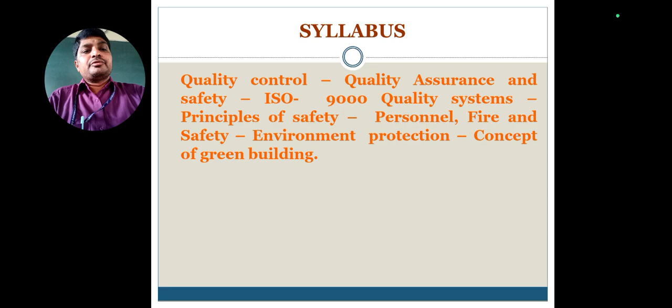I am going to explain about quality control, which comes under Unit 3 of Project Management subject. First, what we have in the Unit 3 syllabus: quality control, quality assurance, quality safety, ISO 9000 quality systems, principles of safety, personnel and fire safety, environmental protection, and the concept of green building.

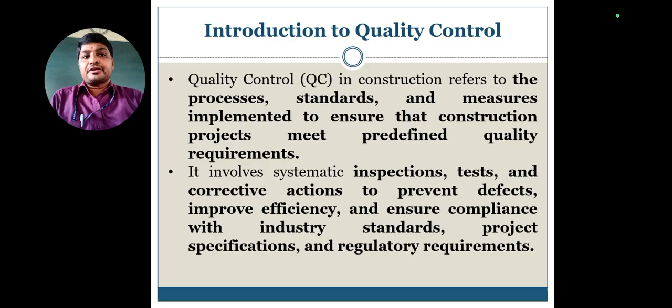Coming to the introduction part: quality control in construction refers to the processes, standards, and measures implemented to ensure that construction projects meet predefined quality requirements. It involves systematic inspection, tests, and corrective actions to prevent defects and improve efficiency and ensure compliance with industry standards.

Then, what is the importance of quality control in construction? It is to ensure safety, that means reducing structural failure, accidents and hazards that may happen, which will be reduced by ensuring safety.

With compliance of standards, local building codes or national and international codes will be satisfied through maintenance of quality, and safety regulations to be followed and industrial best practices to be implemented in the construction site, along with enhancement of durability, which increases the lifespan of the structure.

We can reduce rework and cost by preventing costly repairs and project delays. So that means this is the importance of quality control.

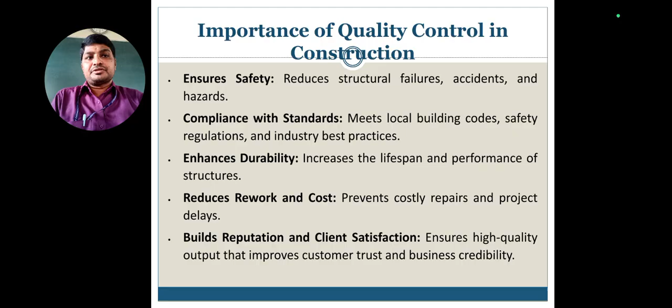For this kind of importance, quality control also builds a reputation and client satisfaction. So in this way, quality control is very important, and the construction industry should follow the rules and regulations for quality control.

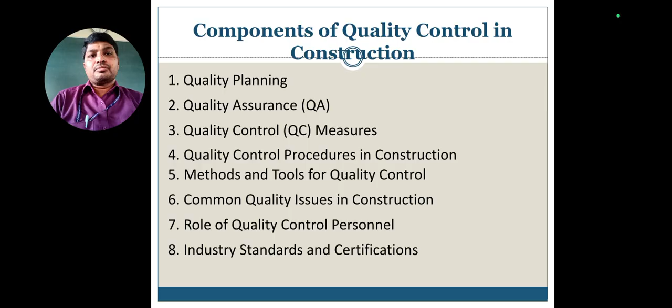Quality control has a number of components: quality planning, quality assurance, quality control measures, quality control procedures in construction, methods and tools for quality control, common quality issues in construction, the role of quality control personnel, and industry standards and certification.

Coming to the first one: define the project quality objectives and identify the quality standards like ISO 9001 related to the construction industry, ASTM international standards, BS British standards, and ACI American Concrete Institute. These give some standards which are identified by quality, and developing the quality management plan also comes under this quality planning component.

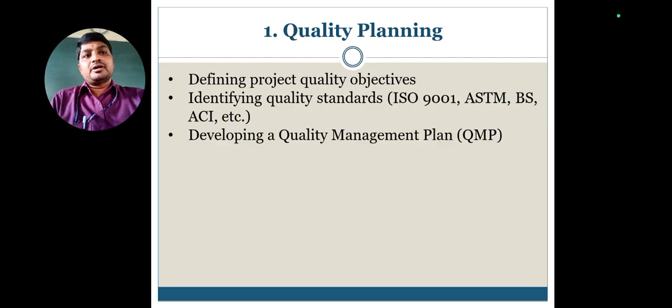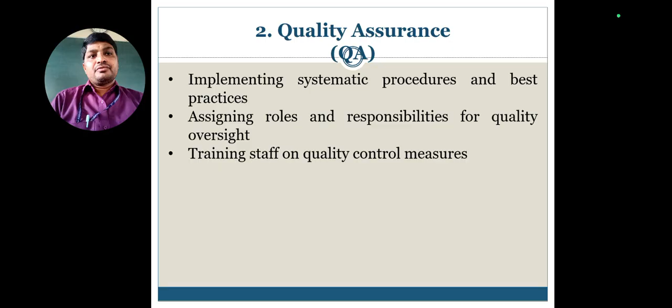Quality assurance involves implementing systematic procedures and best practices, assigning roles and responsibilities for quality oversight, and training staff involved in the construction site, like labor, supervisors, or engineers, for getting quality control measures.

The third one is quality control measures: material quality control, workmanship quality control, and testing and inspection process. Material quality control ensures the raw material complies with specifications. Workmanship is checking proper execution of construction activities. Testing and inspection is conducting periodical on-site or laboratory field tests for material and workmanship.

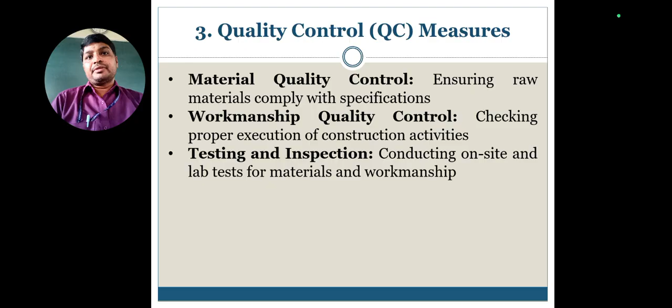The fourth one is quality control procedures in construction. There are three kinds of procedures followed: the pre-construction phase, during construction, and after completion of construction.

Coming to the first one: establishment of quality control procedures and quality benchmarks. The benchmark should be fixed by quality control, and that benchmark should be satisfied with implementation of qualitative material, qualitative design, drawings, specifications, and conducting supplier material evaluations. This way, the pre-construction phase of quality control measures should be completed.

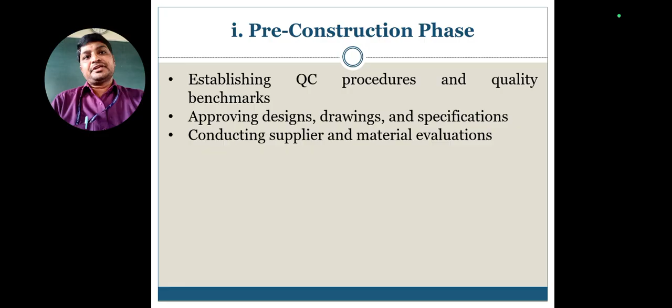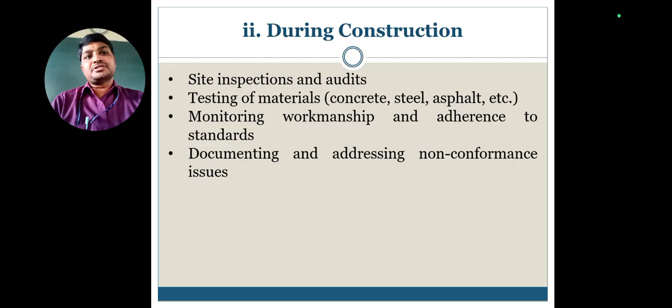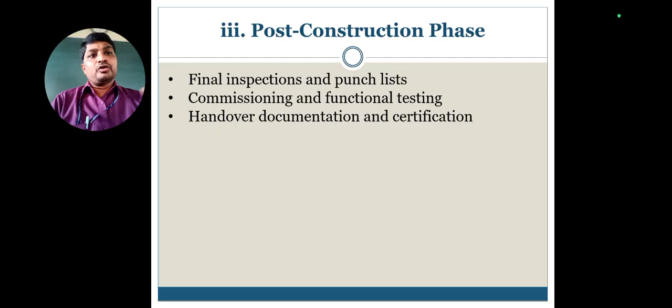Final inspections and punch lists should be prepared, and commissioning and functional testing should be prepared, and handover documentation and certification given to the client or owner. That is the final stage of quality control which has to be completed.

Then one more component, the fifth one: methods and tools for quality control. First, visual inspection should be completed. Second is material testing. Third is non-destructive testing like ultrasonic, radiographic, and magnetic particle testing.

And statistical quality control, that is analyzing defects using statistical methods, and use of technology like drones or artificial intelligence based defect detection, and building information modeling. So a number of methods and tools are applied in quality control.

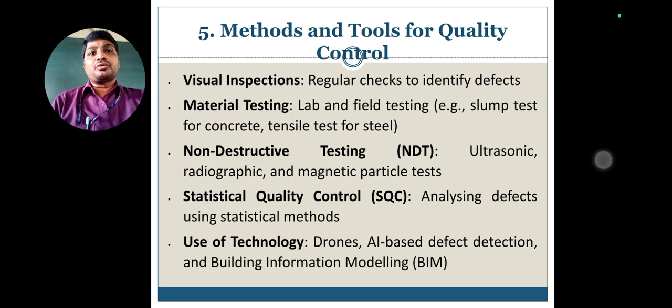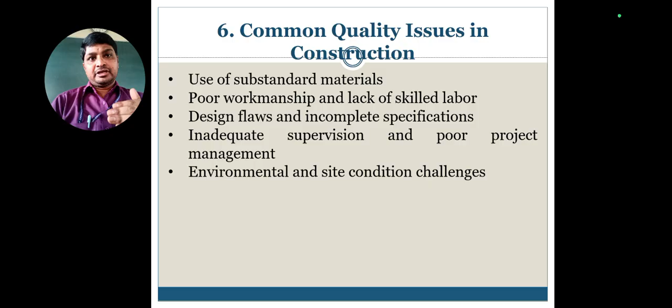One more point is common quality issues that may arise in construction: use of subnormal or substandard material, poor workmanship and lack of skilled labor, design flaws, incomplete specifications, inadequate supervision and poor project management, and environmental and site condition challenges. These come under common quality issues.

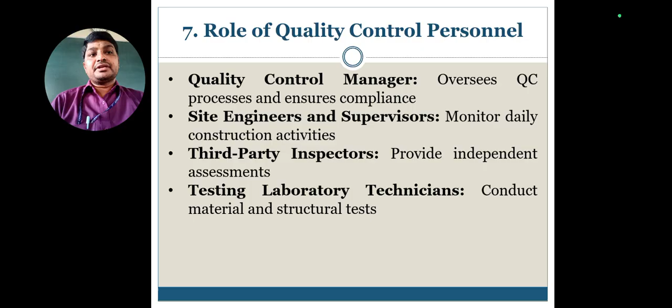The role of quality control personnel: the quality control manager is the boss of quality control, processing and ensuring compliance between the builder and owner. Site engineers and supervisors monitor the construction activities happening in the construction industry. Third party inspectors provide independent assessments, and testing laboratory technicians conduct material and structural tests.

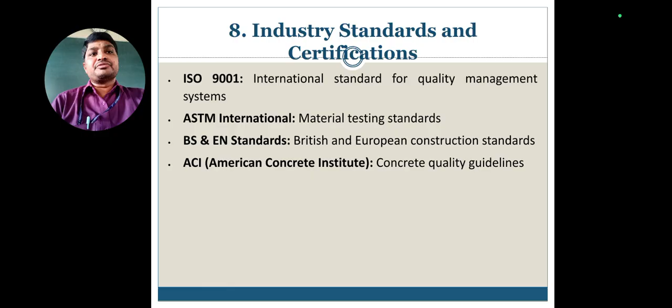Industry standards and certification: the certification process comes from ISO 9001, the International Organization for Standardization for Quality Management System. ASTM International Standards for material testing standards. BS and EN standards like British and European Construction Standards. ACI, the American Concrete Institute, for concrete quality guidelines. These are the standards and certifications that should be followed by quality control.

Now coming to the challenges in quality control and how to overcome them. These challenges are very crucial for the maintenance of quality control.

The first is poor communication, which can be rectified by implementing clear quality control documentation and reporting. Whenever we observe poor communication between labor and supervisors, or between skilled and non-skilled persons, it should be clarified through quality control documentation and reporting processes.

The second challenge is non-compliance with standards. In most cases, this type of challenge arises in the construction industry. Compliance with standards is very crucial, because following standards in quality control is very important. Standards should be followed, and the compliance with standards is very crucial to quality control management.

This can be overcome by regular training or preparation for third party audits. Standards should be followed, and whatever non-compliance activities are located by quality control must be reconstructed, modified, or rectified by the people maintaining the construction industry. That is very much essential.

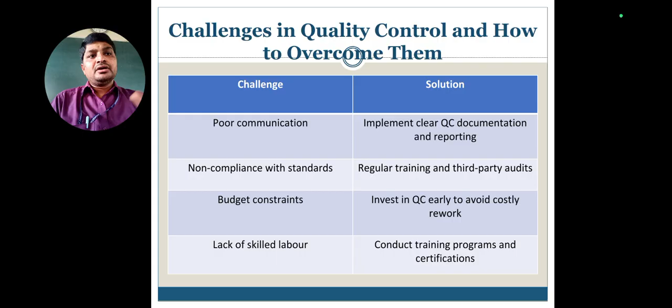Then coming to the advantages, what are the advantages of quality control in construction? It ensures structural safety, preventing accidents, failures, and collapse by ensuring compliance with safety standards, and reducing rework and cost overruns.

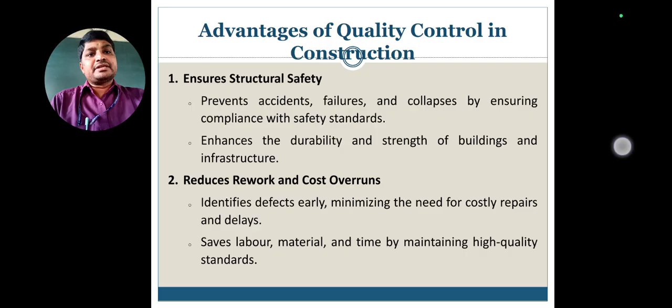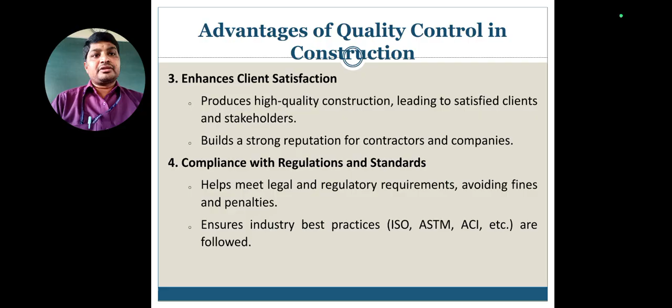It identifies defects early, minimizing the need for costly repairs and delays, and enhances client satisfaction. So finally the client will be satisfied with high quality construction and compliance with regulations and standards, which is also a type of advantage.

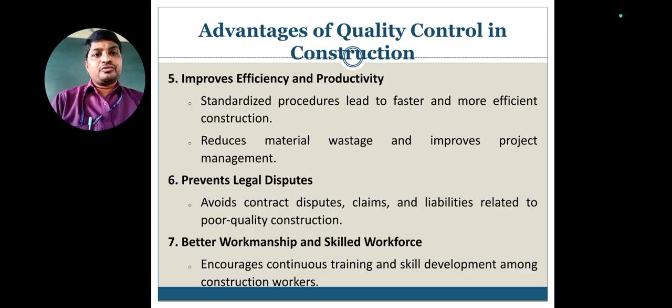One more advantage is it improves efficiency and productivity and prevents legal disputes. Disputes arise between the client and owner, or the client and builder. Some kinds of disputes may be prevented or avoided by providing quality control, and better workmanship and skilled workforce may result from following quality control measures.

A disadvantage of quality control is that it initially has high cost, requiring investment in testing processes, inspection, and skilled quality control personnel, which may increase the overall cost of the project in the short term.

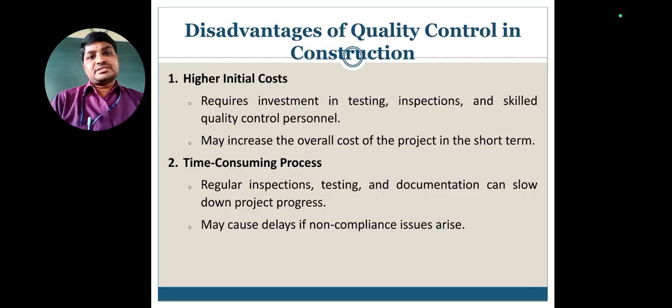Time consuming process is also a disadvantage for quality control, that is regular inspections, testing processes, and documentation can slow down project progress, and may cause delay when non-compliance issues arise.

Complex implementation and dependence on skilled professionals is another issue, requiring experienced engineers, quality inspectors, and auditors. Shortage of trained personnel can lead to inefficiency in quality control.

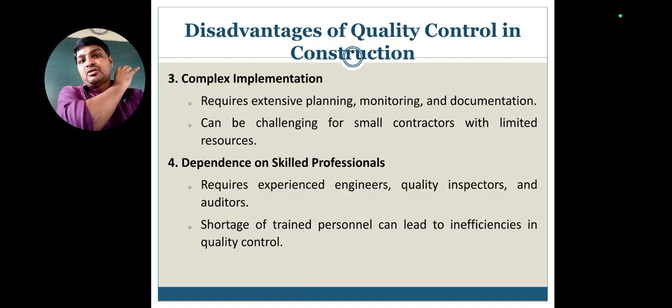Then resistance to changes and difficulty in measuring workmanship quality, and unforeseen site conditions may also be disadvantages, that is unpredictable weather, soil conditions, and labor issues may affect the quality control procedures. So these are the main disadvantages of quality control.

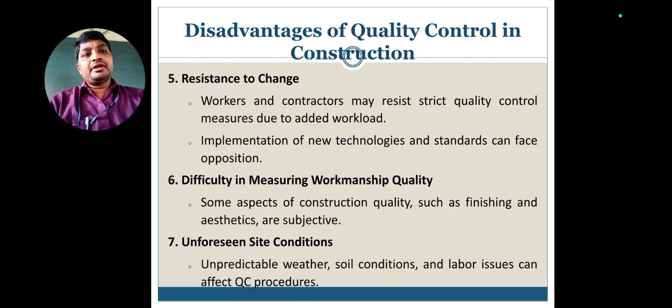And finally, what we conclude is that quality control in construction is a critical aspect of ensuring safe, durable, and high standard structures, and implementing a well structured quality control plan using modern testing methods and adhering to regulatory standards can significantly enhance project success and long term performance.

So in this way, quality control is very much useful in the construction industry, and for following good standards and regulations, codes and regulations should be followed, and the construction should be in safe condition.